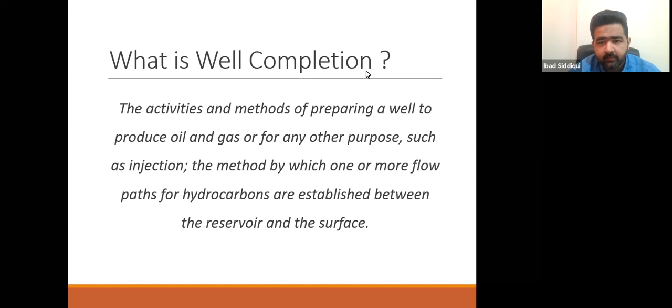It is the method by which one or more flow paths for hydrocarbons are established between the reservoir and the surface. So that is a compact and concise definition of well completion - what we exactly do when we say we are going to complete the well.

Let's suppose, starting from a casing program, we have a generic casing program where we have a 36 or 30-inch conductor in the well. After that, we have run surface casing of 20-inch, then intermediate casing of 13-3/8 inch. We have a production casing of 9-5/8 inch, and then a 7-inch liner. That's a typical, normal, conventional well configuration and casing program.

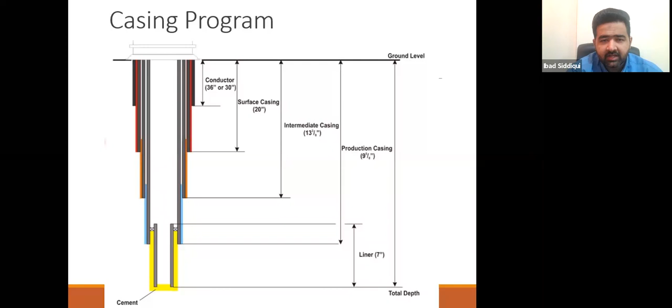After we have achieved this milestone in drilling a well, we will go towards the well completion. Starting with the first tool from the bottom - I'm starting from the bottom so that we take into consideration the sequence as well while learning about the tools. Keep in mind, everyone, we will be going ahead with the correct sequence, learning it along with the tools.

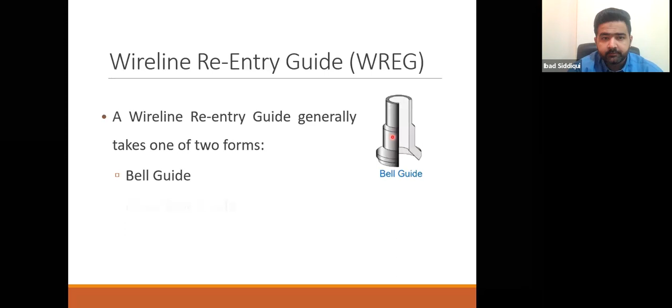Starting right at the bottom: wireline reentry guide. What is a wireline reentry guide? It generally takes one of two forms - first, it could be a bell guide, and the other one, a mule shoe guide. So there are two types available.

What is a bell guide? A bell guide has a 45-degree lead-in taper to allow easy re-entry into the tubing of well intervention tool strings, for accommodating the well intervention tools and the slick line. When we talk about well intervention, it includes slick line, E-line, and also coil tubing.

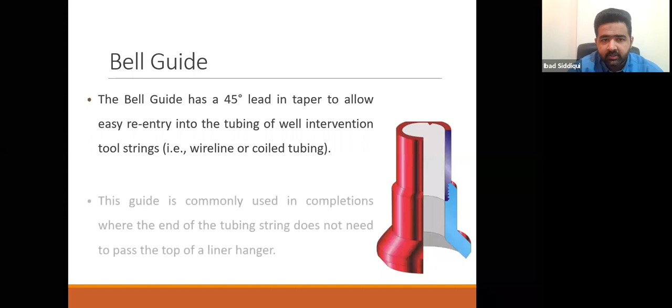So those tools, when we enter and make an entry to the well, this tapered shape right at the bottom ensures and helps us get our tools back inside the tubing. This guide is commonly used in completions where the end of the tubing string does not need to pass the top of a liner hanger.

Let's learn a little bit about a mule shoe guide. What is a mule shoe guide and what is the difference? The mule shoe guide is essentially the same as the bell guide, except it has a large 45-degree cut shoulder. It's almost the same as the bell guide, but this cut shoulder ensures to a more certain degree that the tools we run in at a certain depth outside the tubing, with all different ODs, can come back into the completion safe and sound without getting stuck.

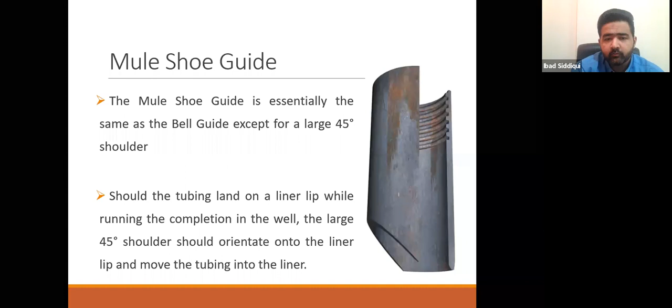The tubing lands on a liner lip while running the completion in the well. The large 45-degree shoulder should orientate onto the liner lip and move the tubing into the liner.

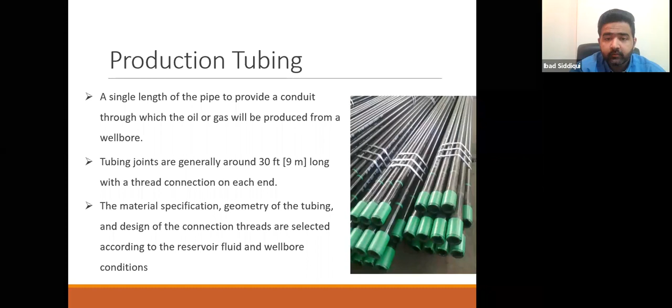So the next one, what is production tubing? Production tubing is actually a single length of pipe to provide a conduit through which the oil or gas will be produced from a wellbore. The tubing joints are generally around 30 feet or 9 meters in length with a thread connection on each end. The material specification of the tubing, the geometry, and the design of the connection threads are selected according to the expected reservoir fluids and the wellbore conditions.

Let's learn a bit more about production tubing. The size refers to the outside diameter in inches or millimeters of the tube body itself. It is available in various external diameters, where API recognized sizes of production tubing vary from a minimum of 3/4 inch to a maximum of 4.5 inch.

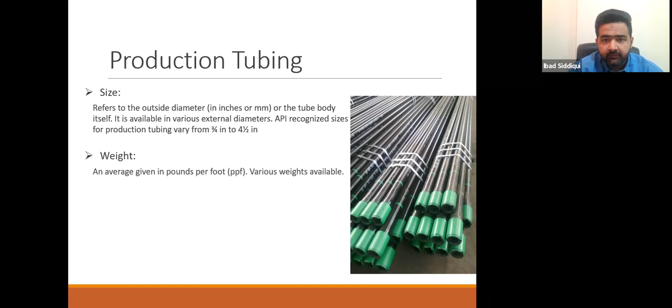When we talk about the weight of the production tubing, it is given as an average in pounds per feet, and various weights are available in the market. The grade is the term used to describe the type of metal alloy the pipe is made of, for example J55, L80, N80, or P105. The fourth one is the thread connection, which is actually the design of the connection on either end of the pipe.

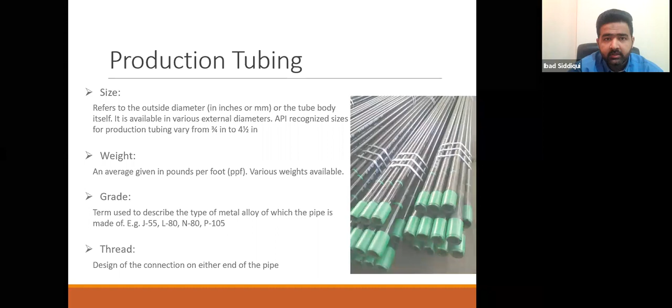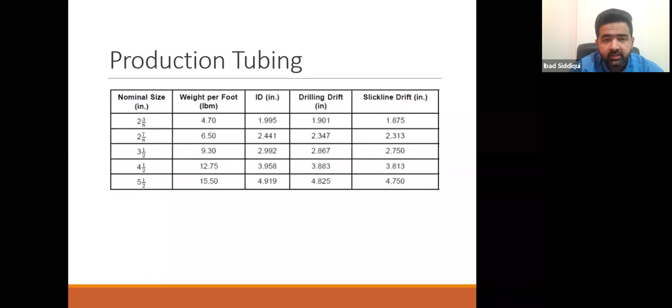Moving on, what are the nominal sizes and the weight per foot for production tubing? The most commonly used tubing sizes are 2 3/8, 2 7/8, 3.5, and 4.5. And 5.5, or 4.5 and 5.5, are mostly used in gas wells where we need to ensure more diameter is there, to ensure that there is no turbulence and no corrosivity.

So moving on, these are the grades. When we talk about J55 or L80 or N80 or P105, it is actually referring to the yield strength of the tubing. L80 refers to an 80 KSI yield strength, which is the minimum for that particular type of production tubing.

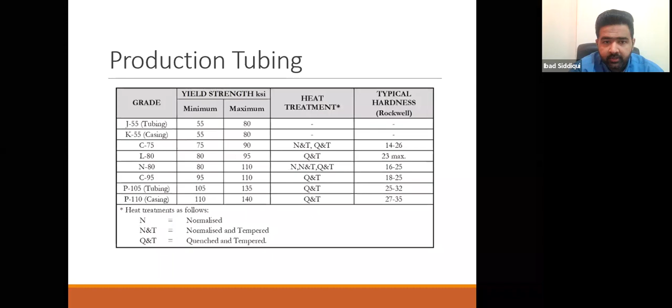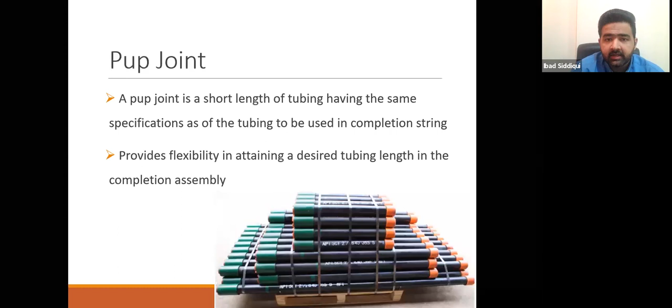So what is a pup joint? I wanted to tell you guys that just above the wireline reentry guide, we actually install a pup joint. And to get to the pup joint, I wanted to let you know about production tubing first. This is actually a short length of tubing, having the same specifications as the tubing used in the completion string. A short length of pipe, the same tubing, just keep in mind, because it provides flexibility and availability in attaining a desired tubing length in the completion assembly.

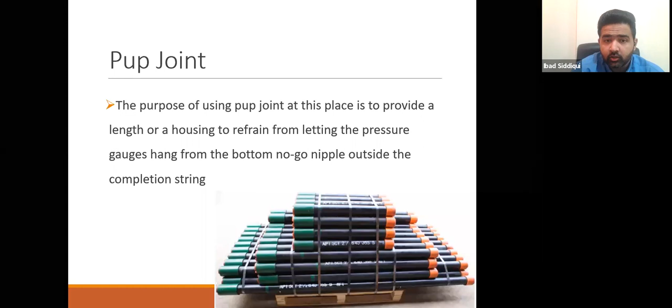So here, the basic purpose of using the pup joint at this particular place, just above the wireline reentry guide, is to provide a length or housing to refrain from letting the pressure gauges hang from the bottom no-go nipple outside the completion string. When we set the hanger with the pressure gauges in the nipple, we want to save the pressure gauges from shaking and twisting. So we keep this pup joint between the bottom no-go nipple and the wireline reentry guide to ensure that the gauges are not outside the tubing.

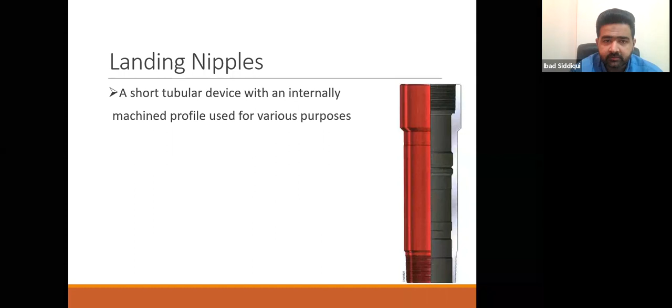So next, above the pup joint, comes the landing nipples. What is a landing nipple? A short tubular device with an internally machined profile used for various purposes. What could be those various purposes? It could be used for plugging the tubing, for removing the wellhead or surface equipment, installing plugs for pressure testing, installing plugs inside the nipple for setting hydraulic set packers, or it could be used for zonal isolation.

Other functions and applications of landing nipples are installing downhole chokes, regulators, SSVs, and we can install bottom hole pressure gauges in those landing nipples as well.

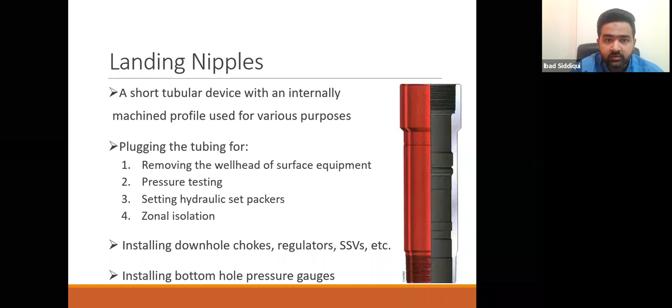So we were talking generally about landing nipples, but here's the bottom no-go nipple, or R nipple for Baker and XN nipple for Halliburton brand. The bottom no-go nipple, just above the pup joint, is installed to incorporate a reduced diameter internal profile that provides a positive indication of seating by preventing the tool or device to be set from passing through the nipple.

The restricted internal diameter created by the no-go profile provides the seating and positioning of a variety of devices. This is actually the least ID, the minimum ID throughout the tubing, throughout the completion string. So it is one of the most important pieces of information, the minimum ID of this bottom no-go nipple, to have throughout the well intervention and completion procedures and operations.

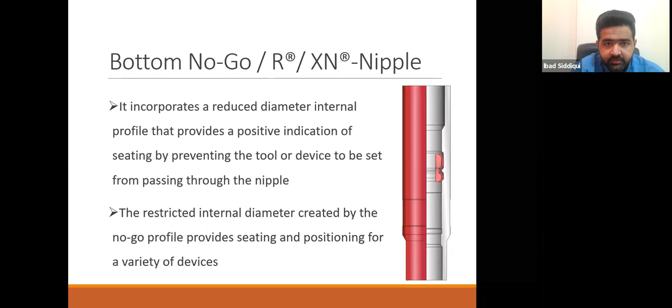Just keep in mind, only one no-go nipple of a particular size is used in a well, usually placed at or near the bottom of the well below the other nipples. So we are using it here at the very bottom, just above the pup joint, and the pup joint has its own purpose. Otherwise, we would have connected it directly to the wireline reentry guide. So this is the bottommost nipple for us in the completion assembly.

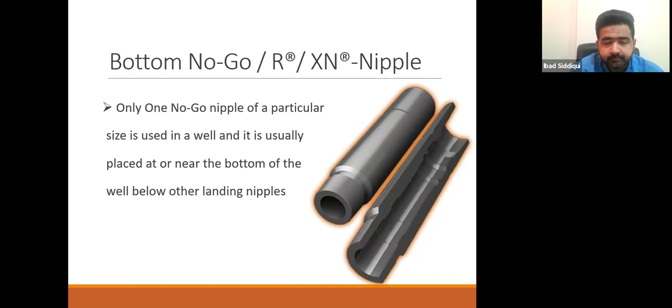Moving on, there is a perforated pup joint. We talked about the tubing joint and the pup joint, and now there's a perforated pup joint. What is its function? The perforated pup joint is actually used in the completion string for the purpose of providing bypass flow, if bottom hole pressure and temperature gauges are installed in the bottom no-go nipple for reservoir monitoring.

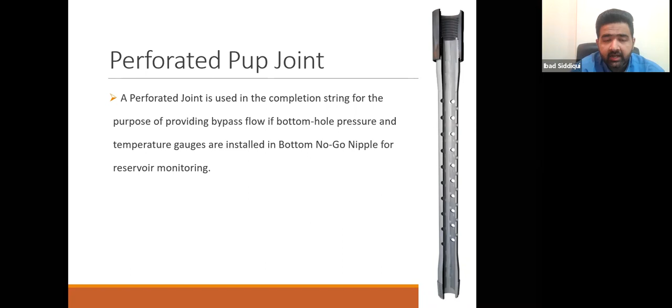This particular perforated pup joint has the same specifications as the tubing used in the completion assembly, and also the pup joint, but the main difference is that it's perforated, it has holes in it. The design criteria of the perforated joint is that the total cross-sectional area of the holes should be at least equivalent to the cross-sectional area corresponding to the ID of the tubing.

So we have to calculate the total cross-sectional area of the holes according to the total cross-sectional area available in the tubing, because we have to make sure that if the gauges are installed in the bottom no-go nipple for reservoir monitoring, the flow does not get restricted. The flow gets a normal flow so that we can have proper measurement of the reservoir and wellbore parameters, and the readings and measurements done by the pressure and temperature gauges are correctly measured.

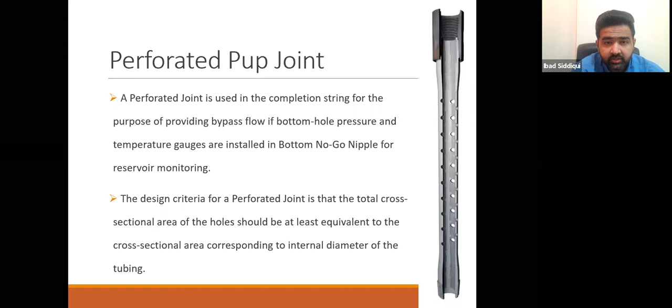Moving up, the top no-go nipple is actually the same short tubular device with an internally machined profile, with exactly the same material specifications as the bottom no-go nipple. The basic purpose is to provide an internal profile for the plugs. So the plugs are installed in the top no-go nipple and the pressure gauges are installed in the bottom no-go nipple, just remember that. I've used F for this for the Baker brand, they have a patent on that, and the Otis tools are called X nipples.

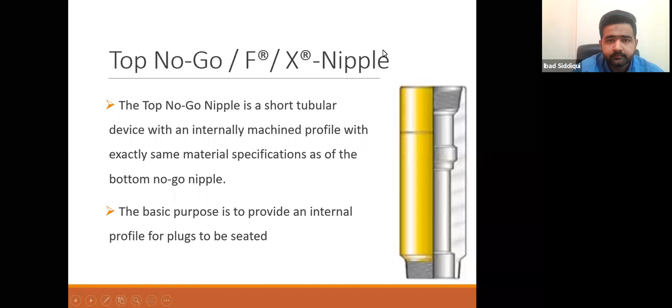Moving on, landing nipples. So the basic difference here: this is an X landing nipple, you can see here, and this is an XN nipple. So this becomes a top no-go nipple, and this becomes a bottom no-go nipple, where if I would not cut that out, by appearance from outside, it looks both the same. But from inside, if we can see the cross-sectional cut, it has a normal profile here.

And the bottom no-go nipple, the XN nipple, XN means it has a no-go ID. So there is a no-go shoulder, which you can see here. And the seal bore area is the same, the key profile is the same, the size is the same, the material specification is the same, but the basic difference is the minimum restriction ID available in the bottom no-go nipple, or the XN nipple.

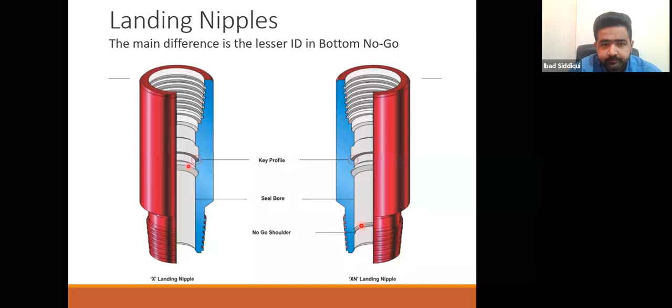So again, we will install another pup joint here above the top no-go nipple. The purpose of using this at this place is to provide a length to be perforated and flow path to be restored in case a plug in the top nipple gets stuck and cannot be retrieved. This pup joint will help us get the flow back from a well if a plug installed in the top no-go nipple for any purpose gets stuck.

There are a lot of examples where a plug is installed for a purpose, then the purpose is fulfilled and you have to retrieve the plug back, but the plug gets stuck. You find it stuck in the nipple. So in making the plan for retrieving the plug safely and effectively, we have to have this accommodation and an option to get this pup joint perforated to at least ensure that the well comes back to flow, so we don't have a panic situation where a well is shut in just because a plug is stuck inside the nipple.

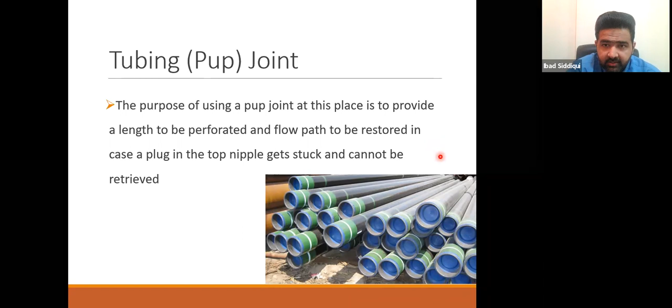Now, above this pup joint, we have a mill-out extension. What is a mill-out extension? It actually provides a larger ID below the packer seal bore, which allows a single trip packer milling tool to be used when the tubing is run below the packer assembly. This additional length and ID is necessary to accommodate a standard milling tool.

So when we have to retrieve the tubing, the completion assembly, the tail assembly, for any workover or problem encountered in a well, we use a single trip packer milling tool which has a small hanger attached to the milling tool. The upper part, the mill, actually mills the packer element, and the hanger tool will hang and bear all the load of the completion tail assembly after the packer is milled and the tail assembly gets free from the well. So the mill-out extension is installed for that purpose.

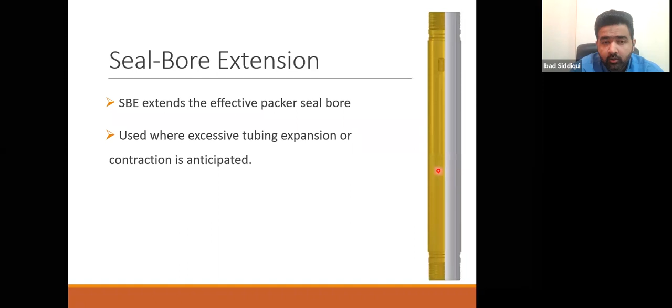Then comes a seal bore extension. What is a seal bore extension? We install it above the seal bore, above the mill-out extension. It actually extends the effective packer seal bore. The packer seal bore, I'll come to that a little bit later. It is used where excessive tubing expansion or contraction is anticipated, to provide an additional sealing bore area when a long seal assembly is run to accommodate tubing movement, and it has the same ID as the packer.

So a packer has a seal bore for the locator seal assembly, and I'll come to those tools a little bit later in the same presentation. The packer seal bore provides a seal bore area for the seals of the locator seal assembly to ensure proper sealing for well integrity. I'll come back to it a little later when explaining the packers and the locator seal assembly, so this will be better understood.

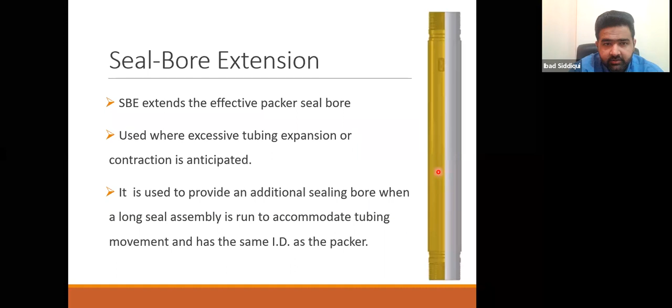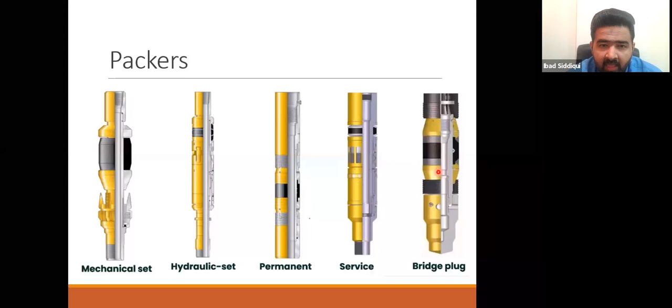Moving on with the packers. What is a packer? One of the most important tools inside the completion assembly. We have 5 different kinds of packers. It varies from the setting method, the purpose of it, the tool length, the specifications, the diameters. So these are the 5 basic types of packers available.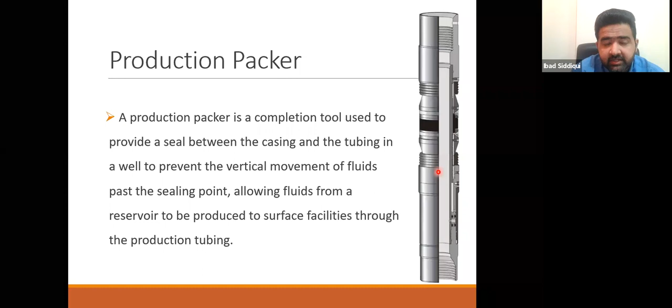If we talk about the production packer, it is actually a completion tool used to provide a seal between the casing and the tubing in a well to prevent vertical movement of fluids past the sealing point. In other words, it provides a seal between the production well and the annulus, allowing fluids from a reservoir to be produced to surface facilities through the production tubing. This seal is absolutely necessary to differentiate between the well and the annulus and to ensure well integrity.

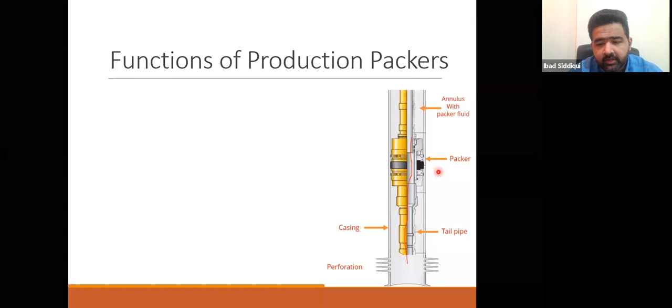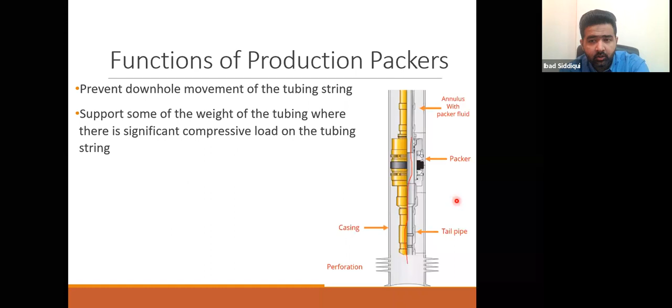So what are the basic functions of production packers? It prevents downhole movement of the tubing string because it has a seal. The tubing, along with contraction and compression, keeps moving up and down, so it prevents that movement. It also supports some of the weight of the tubing where there is a significant compressive load on the tubing string. So when hot fluids are produced, the metal expands and the tubing tends to move, and this packer bears a certain amount of load exerted from the upper completion on the tail assembly.

It also holds the well servicing fluid like kill fluids or the packer fluids in the casing annulus. So when we talk about making the seal between the annulus and the well, it actually gives us the support, and it makes the sealing perfect so that it holds the servicing fluids and kill fluids for later use in well intervention, when we pump in different fluids or treat the annulus at a certain point in the life of the well.

It protects the production casing from corrosion, because the casing has to be protected to ensure well integrity throughout the life cycle of the well. If the packer is not sealing properly, corrosive reservoir fluids will go inside the casing, and at a certain point it will start corroding the casing, which will create a lot of well control issues and well integrity issues.

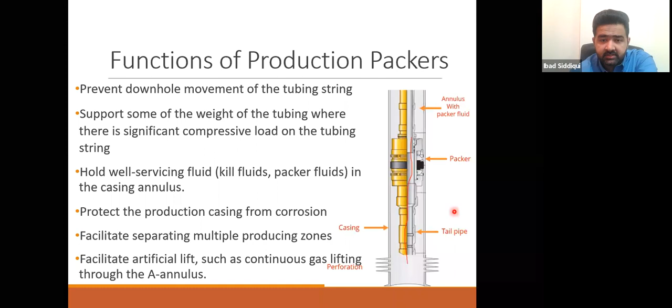If we talk about packer functions, it also facilitates separating multiple producing zones, and also facilitates artificial lift, such as continuous gas lifting through the A annulus.

Moving on with the functions, when I was talking about protecting the casing, just as a scenario, we have a reservoir here and the completion here, shown as a tubing - I'm not showing any jewelry of the completion, just for understanding purposes. So if the packer is not there and tubing is just like this, the reservoir fluids will be going into the casing, and the casing will be in contact with the reservoir fluids.

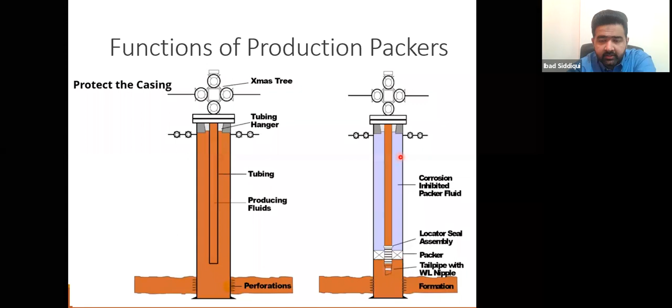But when we install a packer here with the completion tools, it ensures that the casing is free from reservoir fluids contact, and the flow is directly produced with good energy towards the surface, and the casing can remain intact without any corrosion issues. This annulus has to be kept with a corrosion inhibited packer fluid or a completion brine, to ensure that the casing does not get corroded throughout the life cycle.

So moving on, let's learn about the types of production packers. The production packers are classified into retrievable packers and permanent packers. There are two kinds of packers, categorized by the method of setting them - one is retrievable and the second is permanent. So let's...

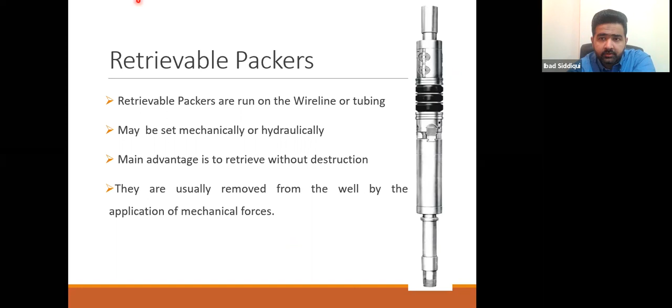Let's try to learn about retrievable packers first. Retrievable packers are actually run on wireline, E-line, or tubing. They may be set mechanically or hydraulically, and can usually be removed from the well by applying mechanical force - the main advantage being retrieval without destruction. A retrievable packer is installed when there is a plan to retrieve it at a certain point. Most of the time when a drill stem test, or DST, is run, the completion assembly of the DST is run with a temporary packer, which is set and retrieved at a certain point through a retrievable packer.

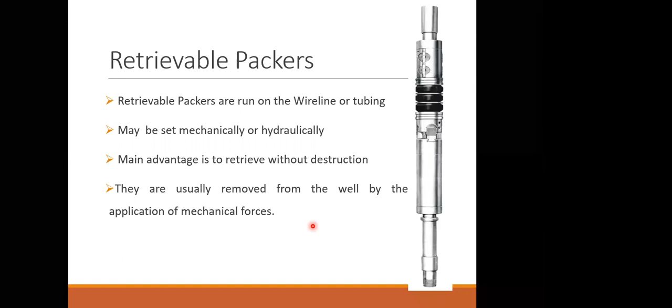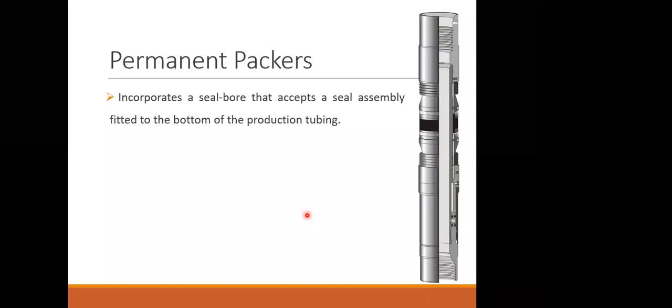Moving on, let's learn about permanent packers. It incorporates a seal bore that accepts a seal assembly fitted to the bottom of the production tubing. Permanent packers can be set hydraulically by applying pressure on the tubing or drill pipe, or set by electric current shot on E-line. So it has both options, but mostly it is set on wireline to ensure the packer is set accurately at depth with proper depth correlation, so we ensure it is not set on a collar or joint of tubing, and that the setting depth is in the middle of any tubing joint, wherever it is set.

And it can be retrieved only by milling. That's why it is called a permanent packer, because it cannot be retrieved without milling, and milling needs a rig and a rig workover for that purpose.

So let's talk a little bit about the comparison between permanent packers and retrievable packers. There are some advantages for permanent packers - it has a performance envelope, generally higher pressure ratings, where it is deemed necessary to use the permanent packer when we have a higher pressure envelope and need higher pressure ratings. For permanent packers, the packer-to-tubing seals are retrieved without the packer, and it holds pressure from above or below without set down weight or tension.

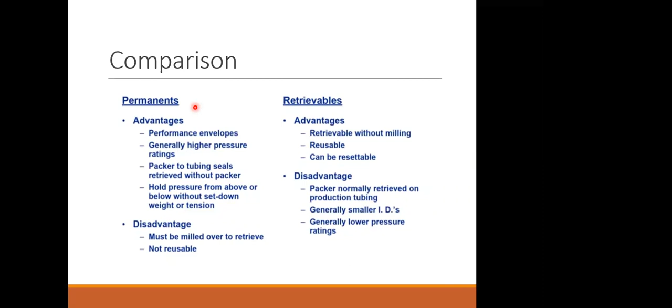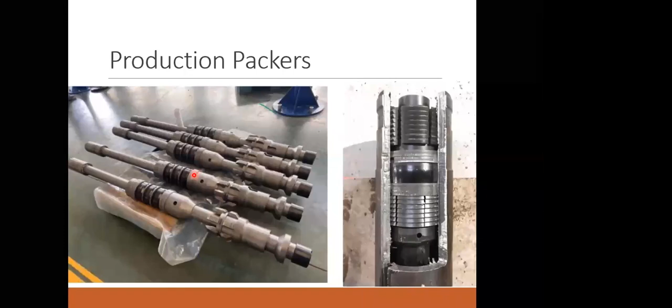So in those cases, we generally go towards permanent packers. Moving on with the production packers, there are some real pictures where it is actually a retrievable packer lying in the warehouse, ready to go to a well.

So actually, when we talk about the parts of a packer, this is actually the casing of the well, and the packer is set here. So the seal element you can see in the packer is here. This is the main sealing element, which is actually holding the whole tail assembly against the casing wall.

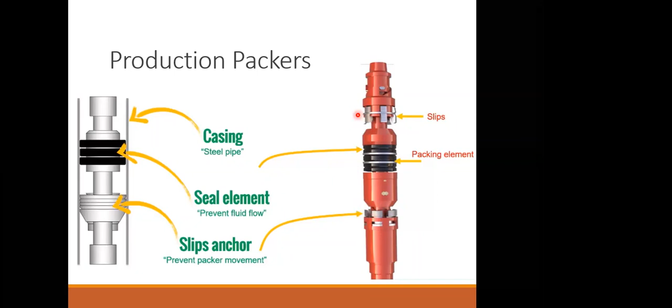And these are the slip anchors, which actually provide support and the basic locking mechanism of the packer against the casing. When we say the packer is set, the slip anchors, the slips, are actually taking a bite against the casing, which ensures proper holding of the packer against the casing. The sealing element ensures that this part creates a good seal so that the casing annulus and the production tubing and the well create an isolation between them.

Learning about the components a little bit more, the slips have tooth-like parts outside the packer. You can see here where it forces outward by setting action. It prevents the up motion, and the bottom slips prevent down motion. So up slips prevent the up motion, and the down slips prevent the down motion. This creates a double barrier and double assurance that the packer remains intact and holds good against the casing wall.

And the packing elements, these are the packing elements when they are not on the packer. They are nitrile rubber elements for normal pressure and temperature conditions, and different kinds of material such as elastomers are used for high pressure, high temperature conditions. This part actually provides the seal between the casing and the tubing.

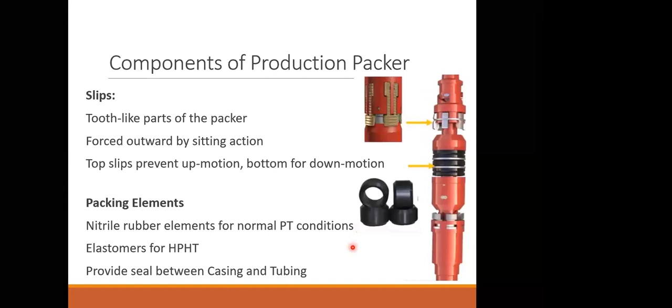This part has a polished bore inside. When we talk about the polished bore, it is there to ensure the locator seal assembly seals create a good seal against that.

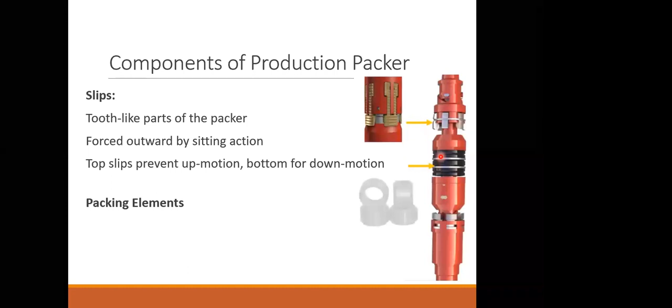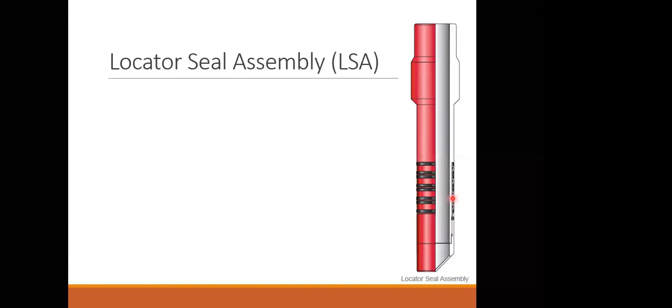And if, during operation or by manufacturing, the seal bore is not shiny enough or not in proper condition, these seals of the locator seal assembly will not hold pressure and will not seal. The seal assembly is typically longer than the seal bore to enable some movement of the components while maintaining an efficient seal. So with the flow of production fluids throughout the well life cycle, the tubing, the upper completion, keeps moving up and down with compression and expansion according to the temperature environment of the well.

So the sealing elements, you can add 3 or 4 or whatever is necessary according to the length and according to the depth of the well. We have to keep this length of sealing elements a little bit more than the seal bore of the packer, so that if it moves up and down, at least some part of the seal is ensured to be inside.

Talking about the seal bore extension again, we know that these seals from the upper completion create a seal against the polished bore. To extend the seal bore of the packer, we install a seal bore extension below the packer, so that the seal bore area is extended for the locator seal assembly, ensuring the sealing elements seal against the polished bore. So this is the basic method and criteria of having these 3 tools in that sequence.

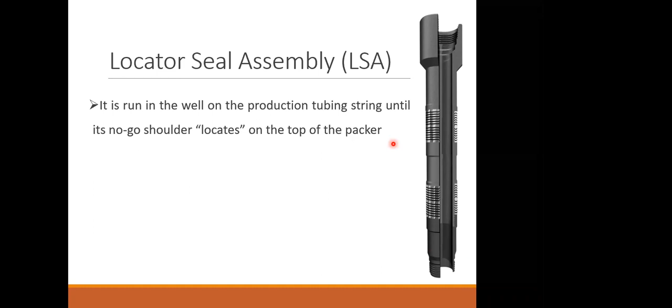This locator shoulder sits on top of the packer, giving an indication at the surface that the locator seal assembly has actually set and reached the desired depth of the packer, and that the sealing elements are against the polished bore of the packer. So this gives us that surety and indication.

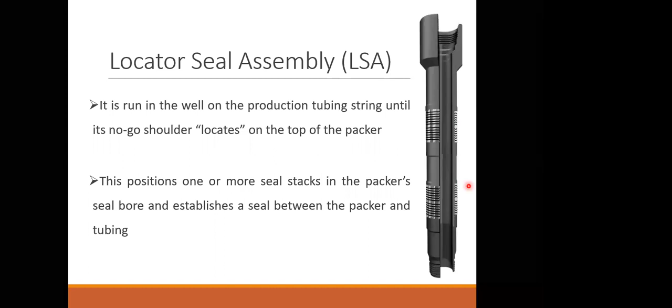This positions one or more seal stacks in the packer's seal bore and establishes a seal between the packer and the tubing. The locator ensures we've reached the correct depth and set the locator seal assembly and upper completion correctly, and the sealing elements ensure the sealing between the annulus and the tubing itself.

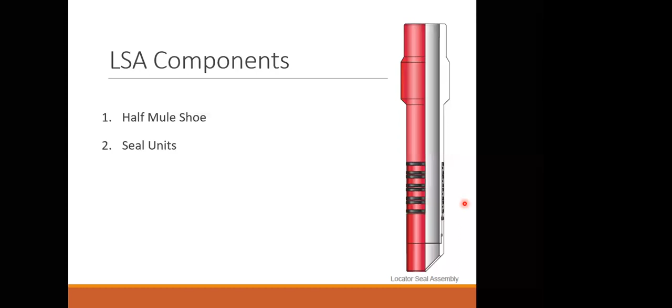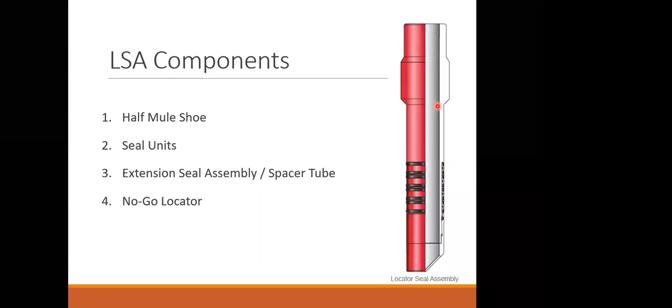There are four parts of the locator seal assembly, starting from the bottom: the half mule shoe, which is the bottom of the upper completion assembly. Then it has seal units - these are the seal units here. Then it can have a spacer or extension seal assemblies to ensure the correct length of the locator seal assembly, so that the packer's seal bore has the sealing elements inside and the locator sits right at the top of the packer. And then there is a no-go locator, or shoulder, which is called the locator in the locator seal assembly.

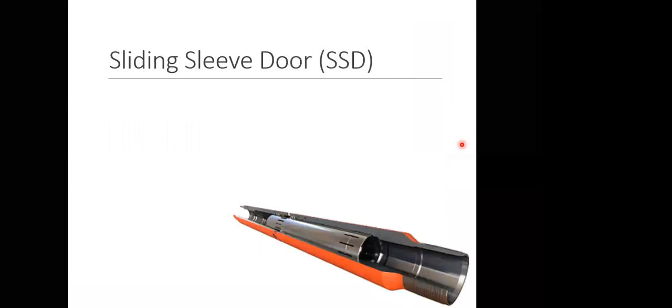Moving up, we have one of the most important tools in our completion assembly, called the sliding sleeve door. So what is a sliding sleeve door, or sliding side door? It's actually a communication tool that allows controlled communication between the tubing and the annulus. It consists of two concentric sleeves.

You can see here, this is a seal inside - it's a cutout for explanation purposes. This is the inside sleeve, and this is the exterior of the SSD. Both have open ports - the inside sleeve has ports up and down, and the exterior body of the SSD has these ports here.

It ensures that communication is achieved at a controlled amount wherever necessary, and the inner sleeve can be moved using well intervention tools such as slick line or coil tubing. Downhole through-tubing tools are usually wireline, but we can also use coil tubing to align the openings and provide a communication path for the circulation of fluids.

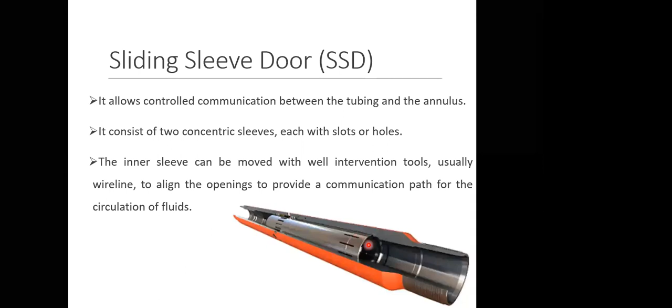When the openings of both sleeves are aligned, it creates a communication path required at any point wherever necessary, ensuring communication between the tubing and the annulus. When these ports are not aligned, it creates a lock, and the SSD is deemed closed for the well to produce in the normal way.

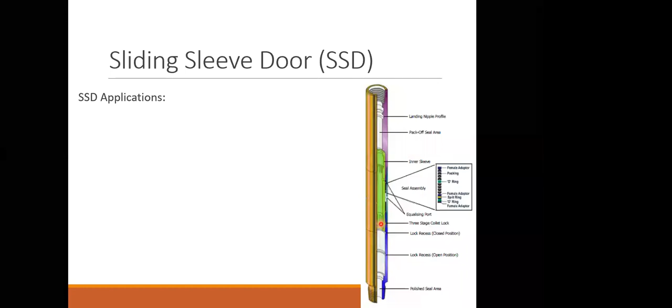Moving on, what are the usual SSD applications? What kind of purposes and accomplishments can we achieve using the SSD?

It is usually used to circulate a less dense fluid into the tubing prior to production, and also to circulate appropriate kill fluid into the well prior to workover. If we have to do a workover, we have to kill the well. If we have an SSD inside the well, it provides communication from the annulus into the tubing, and we pump kill fluid into the wellbore so that a rig can come up and do the workover.

As a production device in a multi-zone completion, it can ensure communication at a certain zone where the lower zone is produced below the packer, and this SSD is always installed above the packer so an upper zone can be produced at any point deemed necessary, just by opening the SSD, giving us commingled production.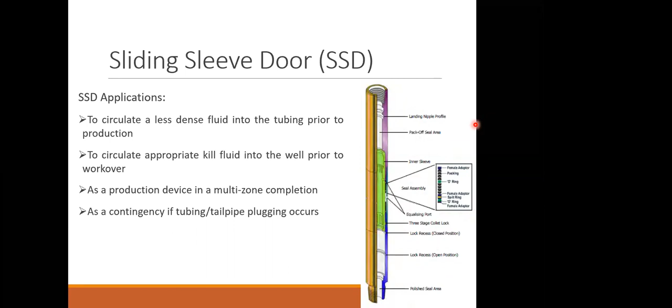It can be used as a contingency if tubing or tailpipe plugging occurs. As discussed with the perforated pup joint, it served as a backup in case the nipple gets stuck, with the bottom no-go nipple having a pressure gauge installed. Similarly, having an SSD gives us a plan B or plan C in case the tubing gets plugged by scale, fill, or sand, making our life easier so we can open this and maintain a certain amount of flow without the well getting shut in.

It can also be used as a contingency to equalize pressure across a deep-set plug after pressure integrity testing. When we pressure test the tubing for integrity, we install a plug as learned earlier. When the plug is set deep, pressure equalization is extremely important during setting and retrieval. If there's a plug set in the wellbore, there's a pressure differential - shut-in pressure held below the plug, and a lesser or zero pressure above it. For the plug to be retrieved, we need some level of equalization, and for that we can use an SSD as a contingency.

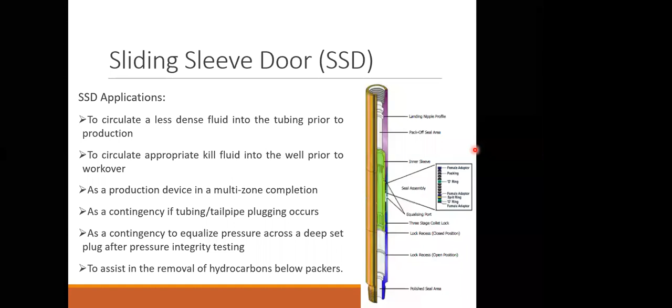It also assists in the removal of hydrocarbons below packers in some cases. The SSD has two concentric sleeves, as we learned. The exterior sleeve has open ports, and the inner sleeve has its own ports, with a sealing element between them.

When we talk about the open position, the SSD is open - both sets of ports on the sleeves align and coincide with each other, ensuring an open path between the two concentric sleeves for communication.

If the inner sleeve ports are not aligned with the outer sleeve ports, this gives us a closed position - we call this configuration the SSD being closed. The seals are always there to ensure there is no leakage among the desired openings.

This is how the concentric sleeves work in the sliding sleeve door within our completion assembly. This shifting movement can be done through slick line or coil tubing. We use specific shifting tools sized for the inner sleeve - the SSD has specifically and appropriately designed shifting tools connected to the wireline tool string, ensuring it is opened or closed as per requirement.

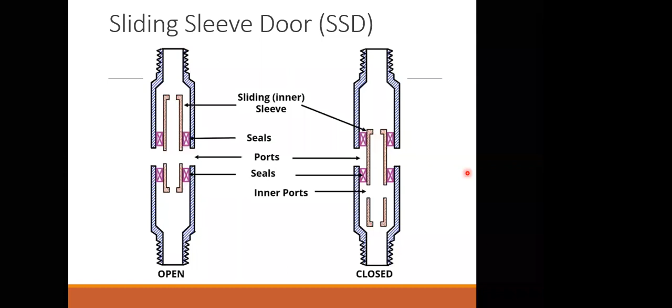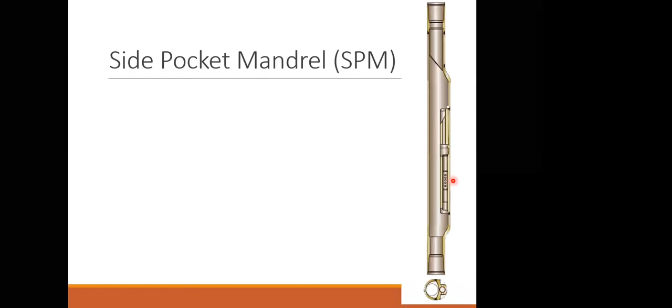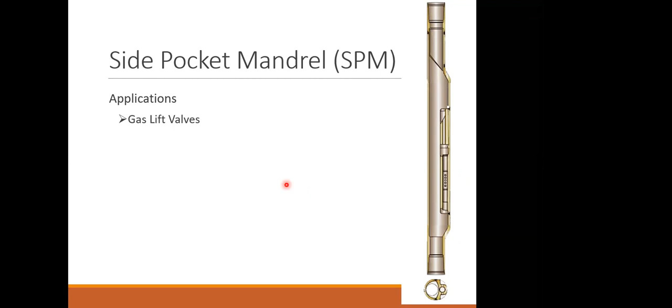Moving on, we have a side pocket mandrel. What is a side pocket mandrel? As you can see in the picture, it has a slightly odd shape which doesn't create any restriction in the wellbore, with a bubble shape outside the tubing OD, used to install gas lift valves or chemical injection valves. If it's not in operation and we don't want to use that port, we can install a dummy valve.

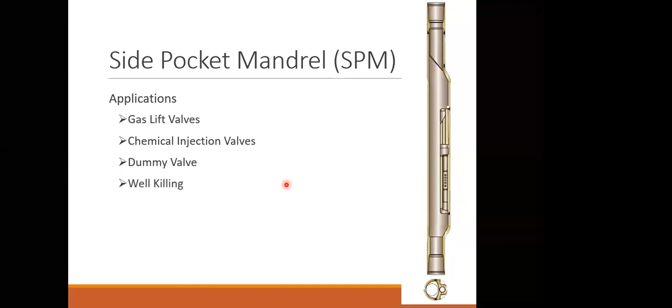So that there is no leakage or opening and communication, and then we can use it for well killing as well. So trying to learn about the SPM.

This is an SPM, and we are using it for communication for the purposes we just saw in the last slide, where if we want to inject any chemical, we install a chemical injection valve or a gas lift valve like this. It has a rope socket above for the slick line tool to catch it and install or retrieve it inside this port. So this is an SPM, and this is the port where the chemical injection valve or gas lift valve will be installed.

In this way we pump the gas or chemical into the annulus, and at a certain operating parameter, the gas lift valve actually starts opening. It has a spring inside ensuring that it operates at a desired pressure or flow condition. So suppose this is a gas supply pump supplying gas inside, it will only open at certain design parameters for a certain gas lift valve, and this is set and retrieved inside the SPM port through slick line.

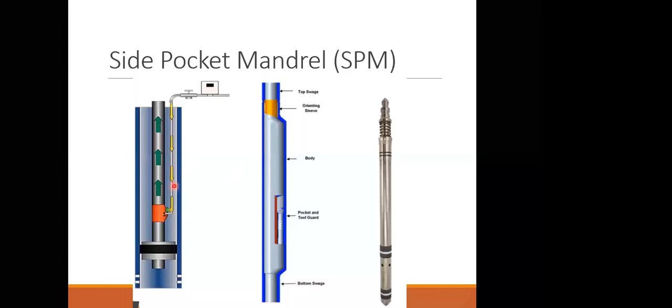Moving on, we have a flow coupling. What is the purpose? A flow coupling is a short section of thick walled pipe, coming in 2 to 4 feet lengths, with tubing threads at the end. It has a thick wall but the same material specification, though the wall thickness is more than normal tubing. But the tubing threads, the pin and box connections, are the same to ensure no crossovers are needed.

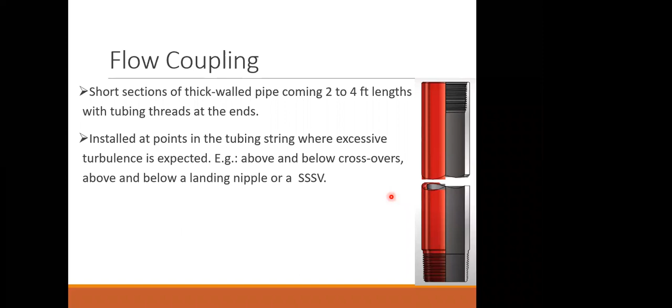But what is the purpose? It is installed at points in the tubing string where excessive turbulence is expected, above and below crossovers, landing nipples, or an SSSV. Any kind of restriction or lesser ID creates turbulence in the flow, and this turbulence causes an abrasive action on the tubing just after that restriction. If a flow coupling is not installed against that, the normal tubing wall thickness will get eroded very quickly and create well integrity issues. So it is installed above and below the restriction to act as a flow straightening device to protect against abrasion.

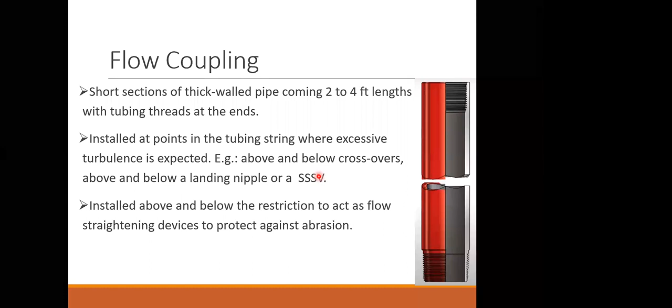So we have learned it will be installed above and below minimum restriction tools like landing nipples, crossovers, or an SSSV, to ensure that the abrasive effect does not erode the normal tubing wall thickness and does not create holes or parting of tubing in the well, which would create communication within the annulus, a well control issue, and an SAP. The additional wall thickness prevents early failures due to erosion in the turbulent flow area.

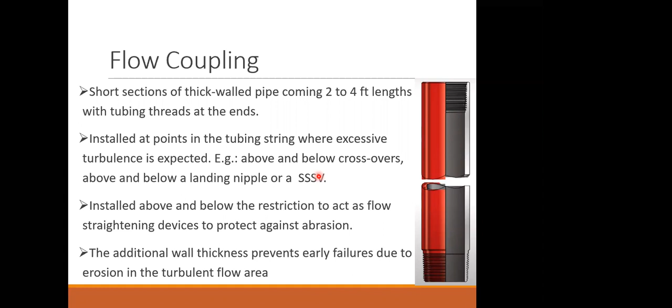So when we talk about flow coupling, it is a thick wall, as I said earlier, with the same connections. It is connected to the tubing which has a lesser wall thickness. But one thing to note here is that the inner diameter is exactly the same, which ensures there are no restrictions despite the greater wall thickness. The OD will be bigger for the flow coupling, but the ID remains intact, and the tubing does not have any difference in the ID.

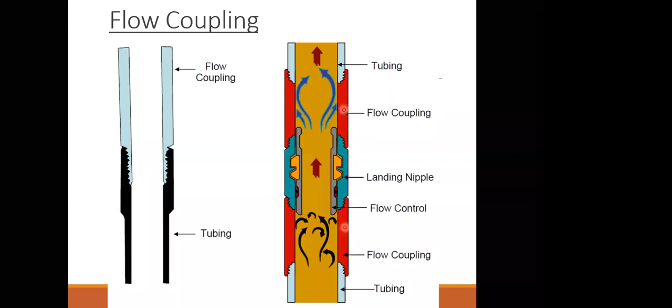In case of a landing nipple, it has a restricted profile. So if we take the flow from a producer, above and below it will create turbulent flow, and this flow coupling will ensure that the abrasive effect and erosion do not get the tubing eroded and making holes inside the tubing, giving a better response to the turbulent flow within the wellbore. So this creates turbulence while producing, and the tubing remains normal ID, normal thickness, while the flow coupling installed above and below the restricted tools has a better response to that turbulence.

So coming on to the downhole safety valves.